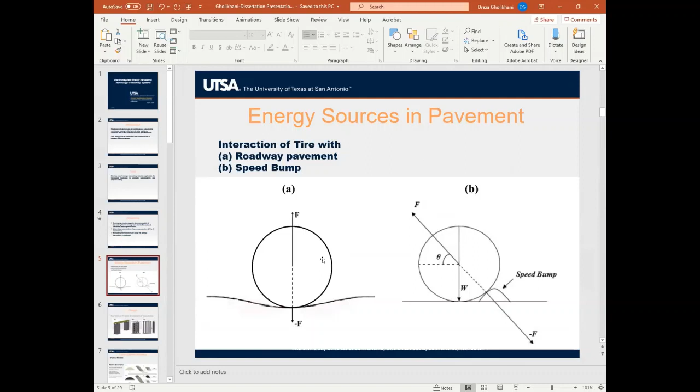So the objectives were developing electromagnetic devices that capture kinetic energy from traffic displacement and then generate electricity. We performed a laboratory examination to see how it works, and the feasibility is evaluated in this study. In this figure, you can see the way the tire interacts with the pavement and also a speed bump, and the force it applies, which in some cases with deflection or displacement generates energy. So we use these forces to generate electricity.

This is the final version of the device that we are supposed to present at the end of the research. We are almost close to this one, but here we only present preliminary studies, not the whole mechanism, because it's under review and also under test. In that case, you can see we use a speed bump. We said, okay, why don't we use a speed bump? Because in a speed bump we have a lot of deflection and deformation, and we can use this displacement to generate the highest value of energy.

Because later on you can see, if we have a lot of displacement, we will have more energy. It's going to be like rack and pinion and other kinds of technology, and also linear technology. I will explain them a little bit later.

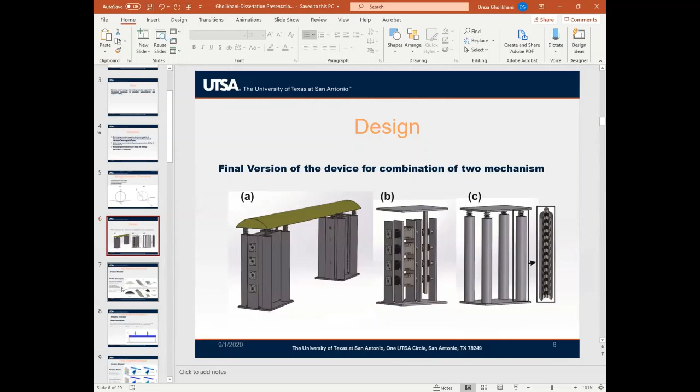So here, before I get to the mechanism, I will present the first part of the device that is subjected to force, the top plate, in this case the yellow part. It's going to be exactly similar to a speed bump, so the driver feels it's a speed bump, but it moves a little forward, upward and downward, to allow us to have enough energy to generate electricity.

We came up with different designs for the top plate. We said, okay, we can have it hollow or we can fill it with some material. We reached two groups. One is the hollow group, which includes the metals, aluminum and steel. Because we want to avoid making it very heavy, we make it hollow to see how it's going to work. In the next group, we have the frame from metal, again steel and aluminum, but we put heavy duty rubber on top of it, the material already used in speed bumps, to see how they work. In this case, we studied them with Abaqus for finite element method.

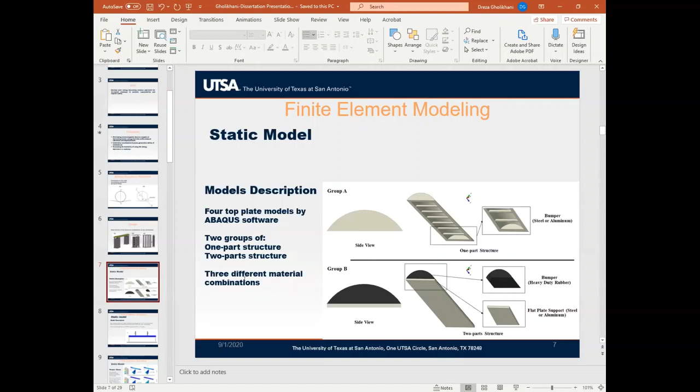We use two different methods, static and dynamic. In a static model, we apply the two forces. Each one includes 3,773 Newton with the distance of 1.77 meter. We will find this value from the weight of the vehicles and the specification of the cars that we will have in our traffic. We go with the sedan car in this case, just for the model. It's going to be a preliminary model.

We applied Young's modulus for steel, aluminum, and heavy duty rubber. As you can see, 200, about 70, and 3 gigapascal. And the Poisson ratio was 0.3 for steel, 0.33, and 0.4 for heavy duty rubber.

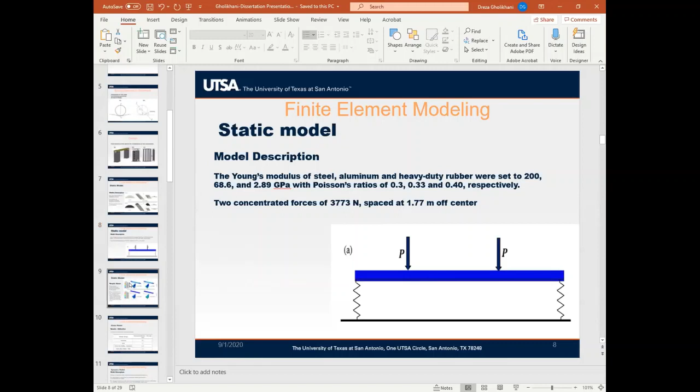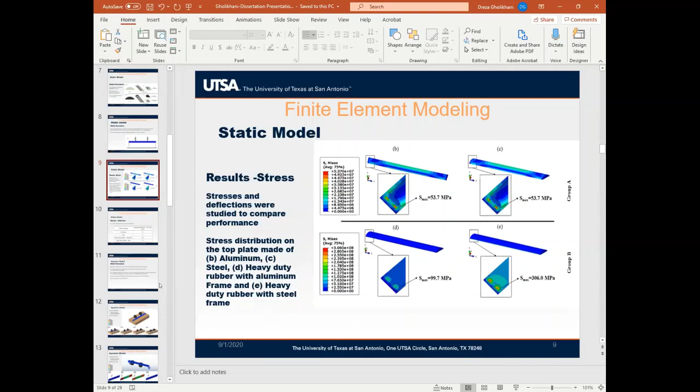And also, as you can see from the result of stress, the results are acceptable for all of them. According to the kind of material, and considering the drivers that will face this material, we came up with the result that maybe an aluminum frame or a steel frame with heavy duty rubber is going to be the best option in this case. Any questions? Okay, so it means that there is no question.

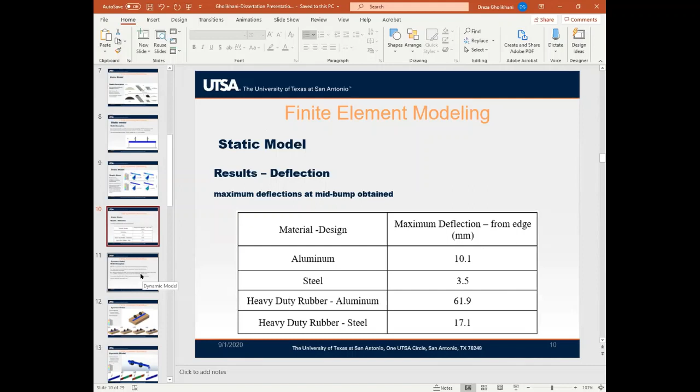Let me go to the dynamic model also. We also wanted to see and better understand the concept of the passing load on our top plate. So again, we applied the same loads as I mentioned before. The distances are the same because they're related to the specification of the car, but the load pressure was 35 psi, which we used again from the car specification. In that case, it's a Toyota Camry.

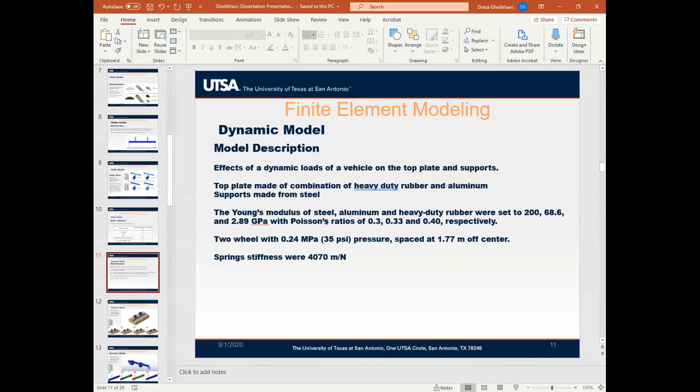And also I will explain a little bit more about the device that we have, where you can see the spring, where the spring is applied, and the spring stiffness was about 4,070. And in this case, we go with the combination of heavy duty rubber and aluminum as a frame for that material, and also again, steel as a material.

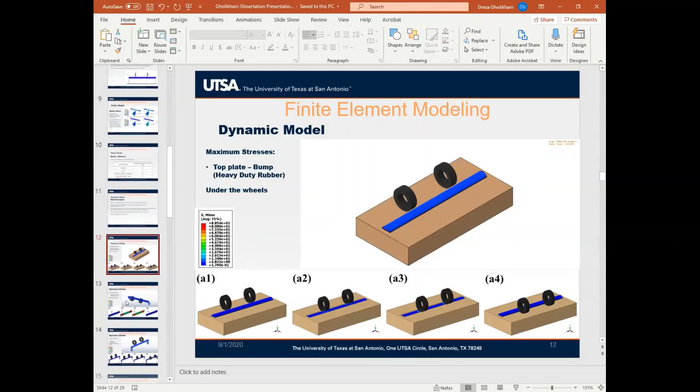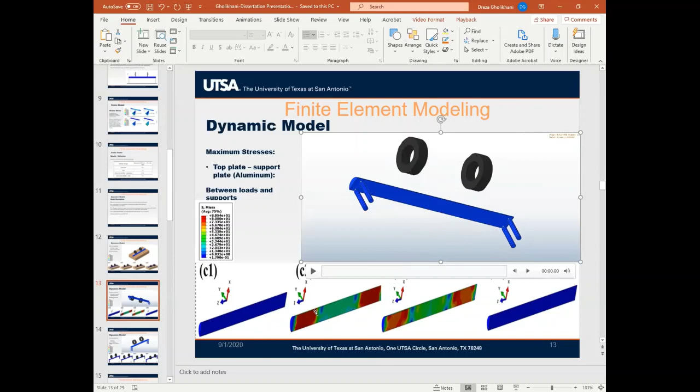Here is another view from the passing car. You can see how the stress is generated in this case. The maximum is between the wheel and the support. Here you can see the result in this figure. When the wheel is over the top plate, you can see the maximum stress and how it's applied on the top plate.

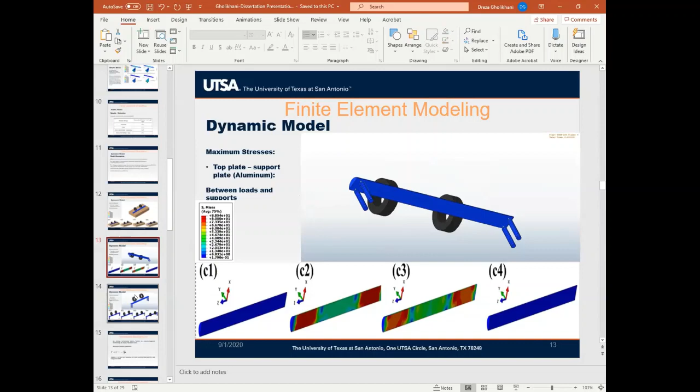And let me show another wheel. You can see the stress on the support that we have and how it's visible. And in the figure, still you can see the maximum happens in the bottom of the support, in this case for the supports, and it's a little bit high in comparison with the top plate.

So we have a spring under our top plate to move downward. After the top plate goes downward, it recovers it to the top again and makes it ready for the next wheel passage. So we are done with the dynamic model for the top plate, and we reached that point that, okay, it's gonna behave the way that we like. So after that, we start generating the devices for the experimental study.

And for the electromagnetic, we follow the Maxwell-Faraday equation that mentions that if we have a difference in our electric field, we will have a magnetic field, or vice versa. If we have a differentiation in our magnetic field, we will generate an electric field. This is the first preliminary for a linear generator.

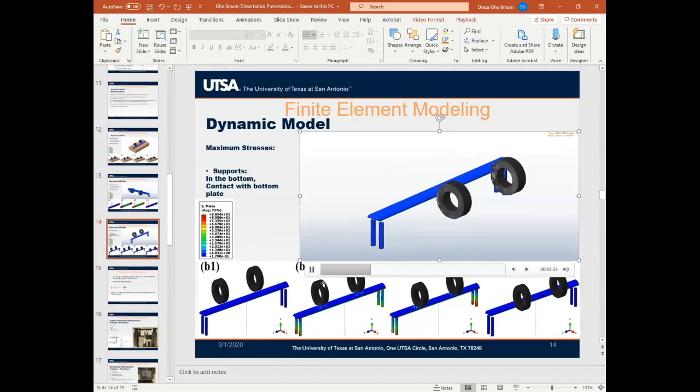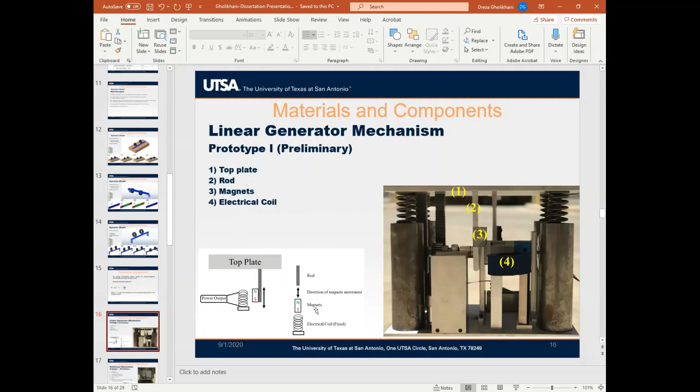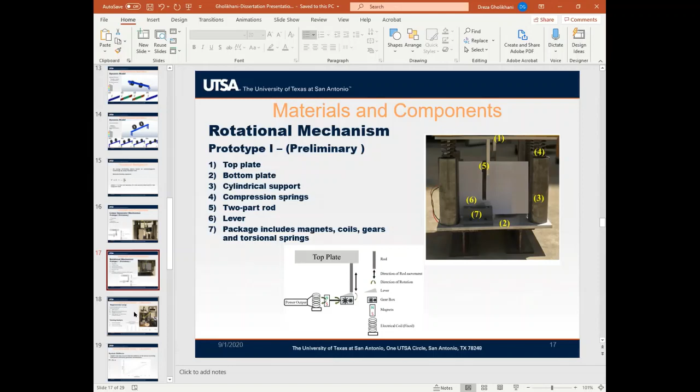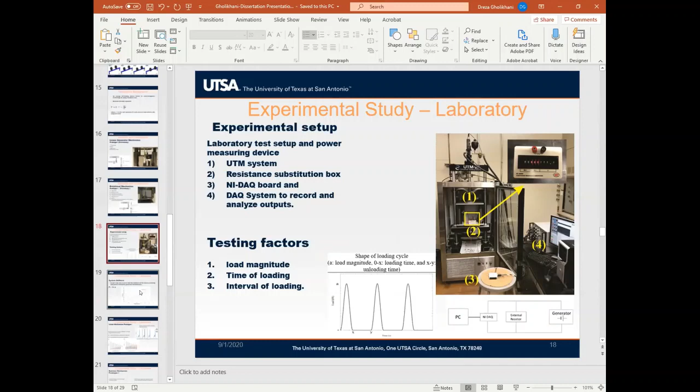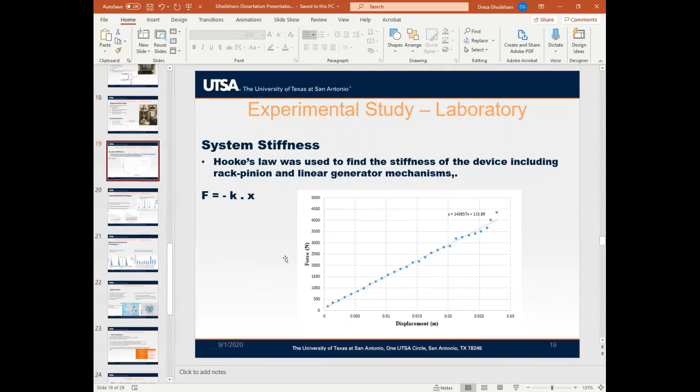Sorry. As you can see, the output power, let me make it a little bit... Oh, it's a little bit hard.

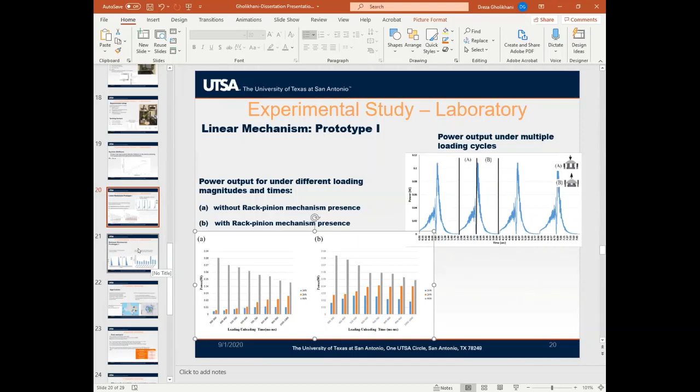So here we have the rotational. As you can see, we have only one peak for each loading and unloading time. It's because our design is based on the way that we didn't generate any movement in our magnet or electric coil when it's moving upward. We need to improve that part by including a new part in our devices.

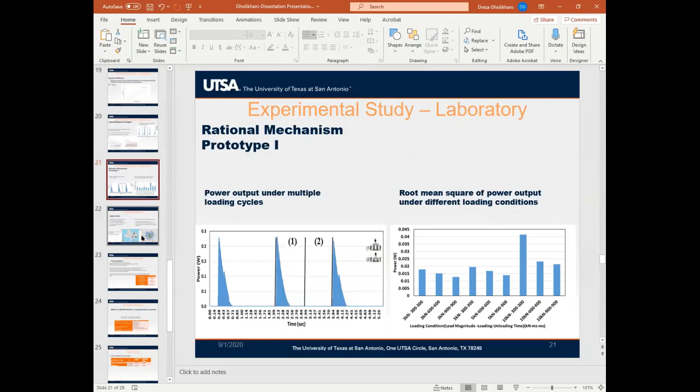And still, as you can see, the result is higher than the previous method, but it still is low. But we are also optimistic that we can increase the result after optimizing our devices. So here, the part that we can apply, you can see the unfortunate accidents in a

school zone in Texas and also San Antonio. There are so many, and we want to prevent them. Even if we just save one person's life, we did our job. So our suggestion is that we can install this device close to the school zone to generate power for at least lights or stop sign illumination.

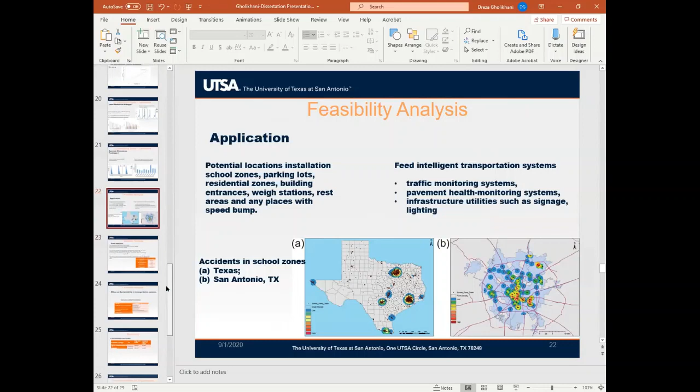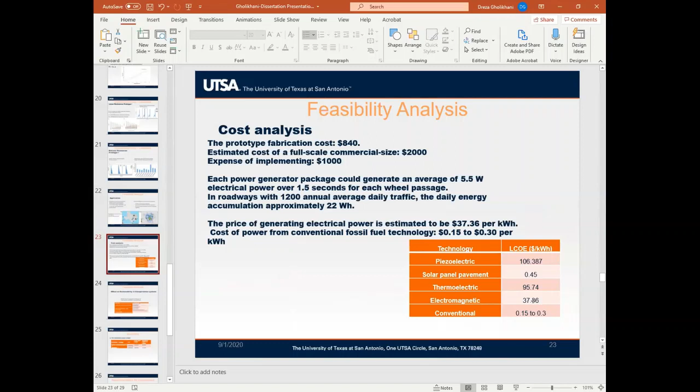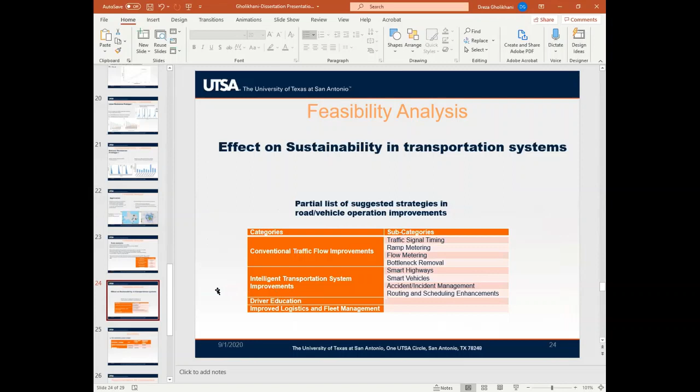Also, we have cost analysis. You can see the cost analysis for different energy harvesting methods in roadways. Electromagnetic is not the cheapest one, especially in comparison with conventional fossil fuel energy, but still it's acceptable, especially at this stage of development. And then we have the effect of our devices on sustainability. We will affect sustainability in transportation by increasing safety and also generating clean energy.

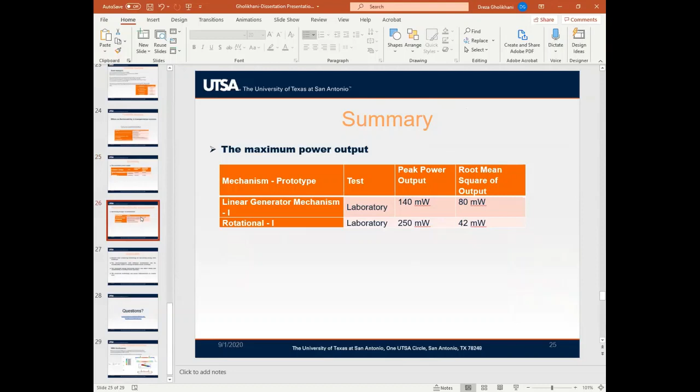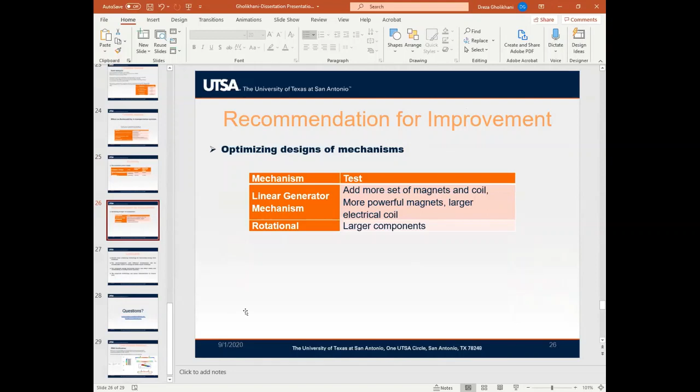These were the maximum power outputs that we reached. You can see the maximum and also root mean square for both technologies here, 140 milliwatt and 250 milliwatt for both devices. And we suggest how we can improve our devices: make larger components for the rotational, and also add more magnet coil sets for the linear generator. It's going to boost our mechanism to generate more energy.

In conclusion, the results showed a promising technology for harvesting energy from roadways. And electromagnetic with different mechanisms can be considered a source of energy for the future, especially in smart roadways. And the device will affect safety and sustainability in transportation without any doubt. One of the good things about these devices is that we can implement them in remote areas without a power grid and generate power for devices, lights and everything in roadways. Thank you.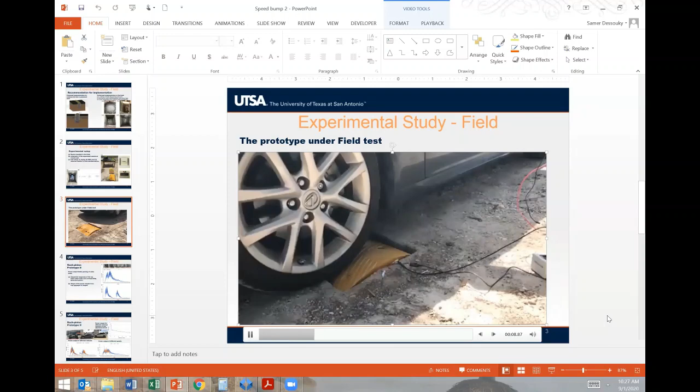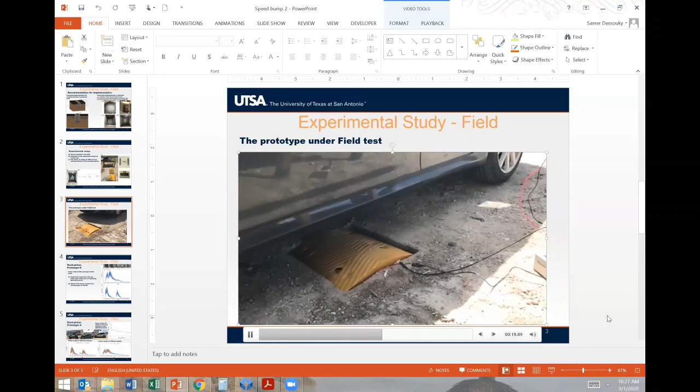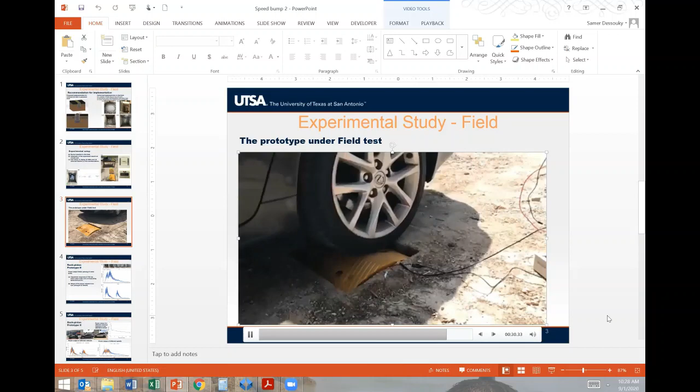So the movements upwards and downwards, that's where it's going to be connected to our power generation devices, and it was actually collected here. And that's the actual cutting that Mohammed did in the field to insert his prototype. And it looks like this when it is all finalized.

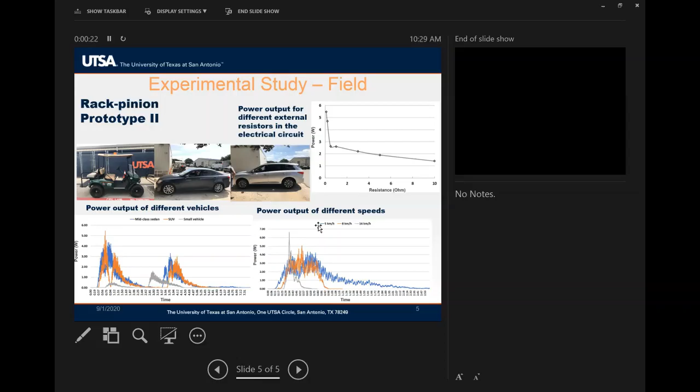Several cars he used on the UTSA campus to test how the components work, and he was able to pick up about 6 watts per pass, especially at low speed. The heavier the vehicle, the higher the load, the slower the speed, the higher the output power he generated. Just wanted to show this since it was missing from his presentation.

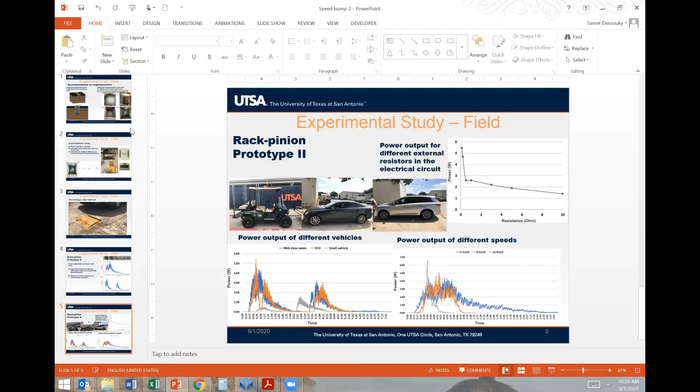Good morning. My name is Andreas Lanen. I'm with the New Mexico Department of Transportation. Can you give us a list of devices that your goal is to actually energize with the system? Sorry, I didn't get the question. Could you please repeat? What is your goal? What are the types of devices that you can see actually being energized utilizing the system? The thing is that we are thinking about two ways.

One is saving the energy and then generating power for existing devices. The other one is that we are connecting them, like working concurrently. So in that case, our first goal is going to be working on lighting, at least for a stop sign, because we know that if we can light a stop sign, especially in remote areas, we can warn the drivers that there is a stop sign in front of them, so lower your speed. Our first goal is that one.

And then we can go with new devices and sensors that we can apply for maybe smart roadways, observing, collecting data and then sending it for real-time monitoring of the traffic. In this case, we are just focusing on that, and after that, if we can improve it so much, then we can go for higher values of energy. Then we can power different kinds of devices in infrastructure. Thank you. Thank you.